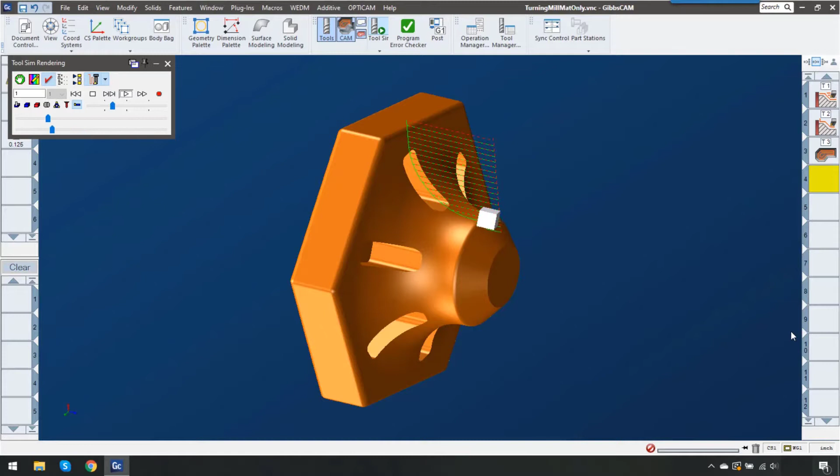This video is going to show the new 3D material only feature in GibbsCAM 14. This feature will calculate the leftover material not just between operations, but between coordinate systems and even between turning and milling operations. We're going to use this example here. So let me get out of simulation and show you how it works.

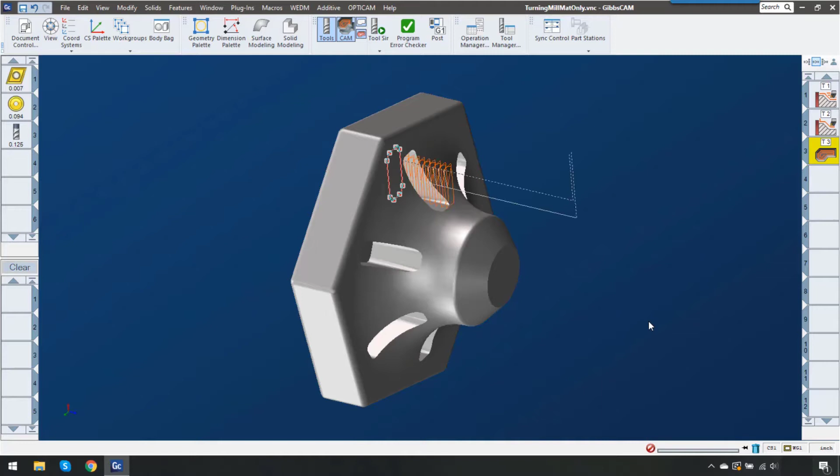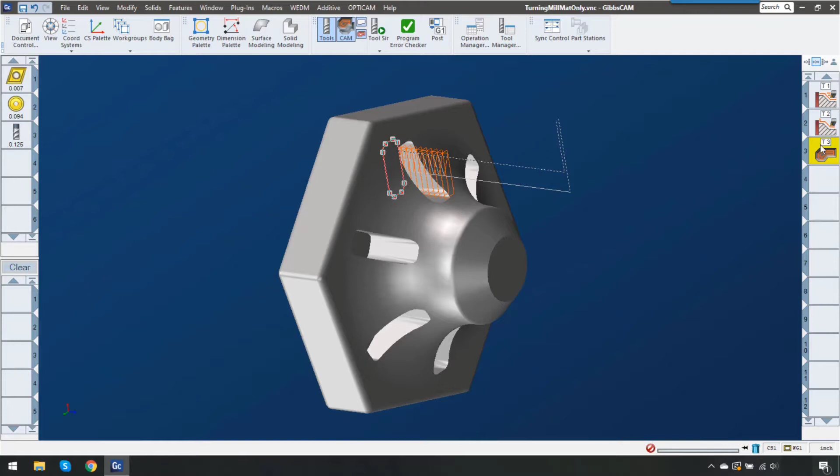So after this part is turned, we're going to end up with a profile, something like this. And because of this profile, you can see that there's going to be a lot of air cutting here to do this pocket. What I want to do is I want to tell GibbsCAM, hey, there was something that happened before this. Let's ignore that material that's not there. And now in GibbsCAM 14, that's really easy to do.

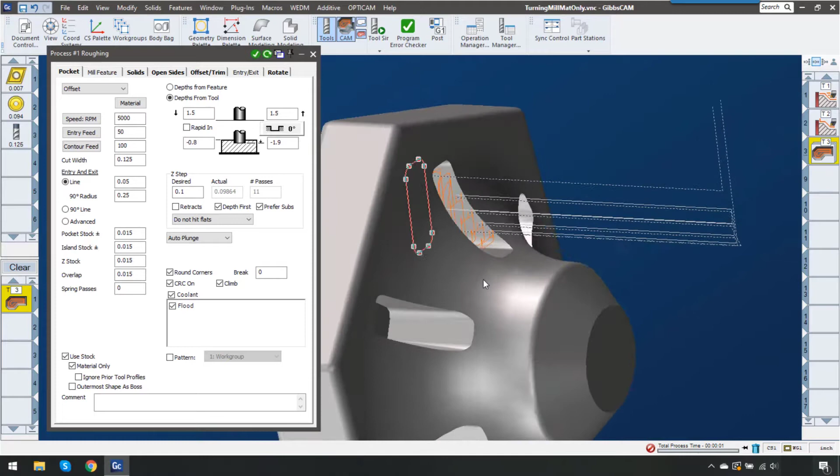So down here at the bottom, we have use stock and just click on material only. This will calculate the leftover material regardless of operation or coordinate system. Now you can see how much more efficient that toolpath is. This is going to cut down on air cutting, which is going to really speed up your cycle time and get parts off the machine much faster.

Now this example was using the difference between a milling operation and a turning operation. Now let me show an example where it's between two milling operations but using different coordinate systems. This milling part, I want to machine on my 5-axis. I need to rough it out and finish it, but the reach on my roughing tool is only about 1.5 inches, and you can see here it's 3.5 inches tall. So I'm not going to be able to get all the way down.

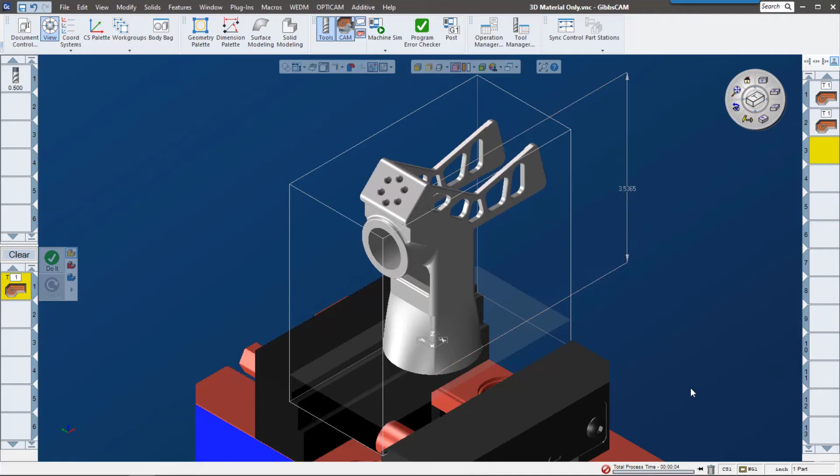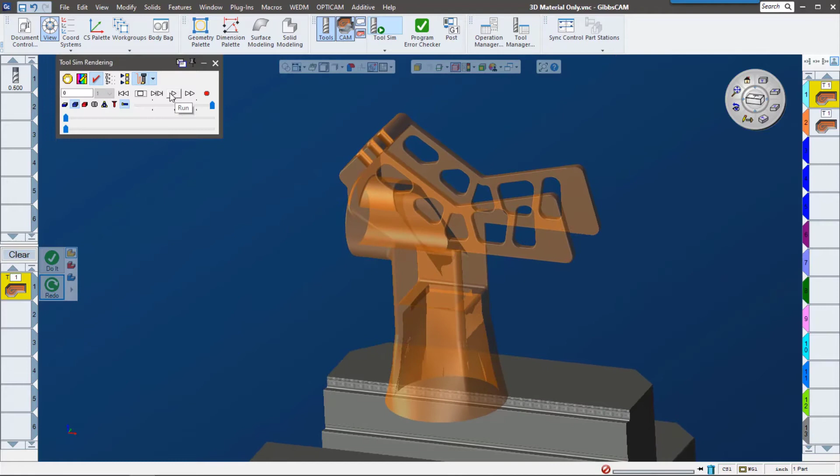Now, the problem is I don't want to have my second tool in this setup have to go through and recut all of the material that it thinks is still there from the previous setup. Now I'll show you an example of that with tool simulation. Here's the toolpath representation from the first tool. Let me continue on to that second tool.

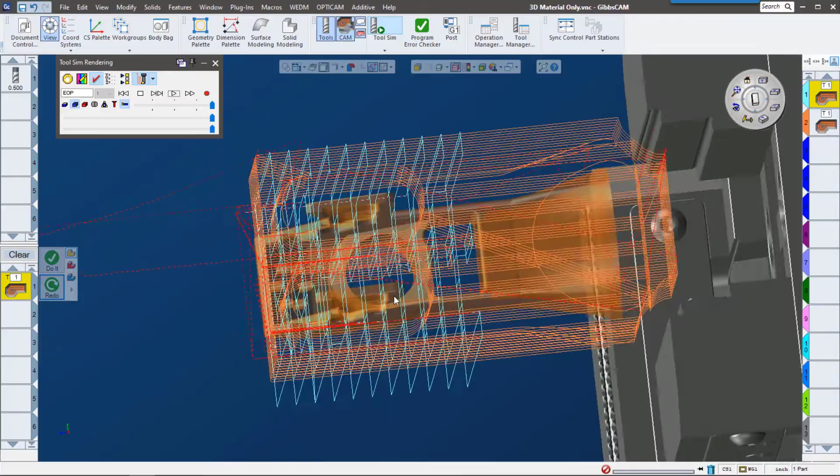So we can see that there's kind of this cross hatching where the two toolpaths actually overlap. If we kind of look at the top view of this, we can see that the second toolpath is actually coming out and trying to clear away the material that's already gone. In GibbsCAM 14, it's really easy to change that. There's this checkbox that says material only. I'm going to go ahead and redo the toolpath.

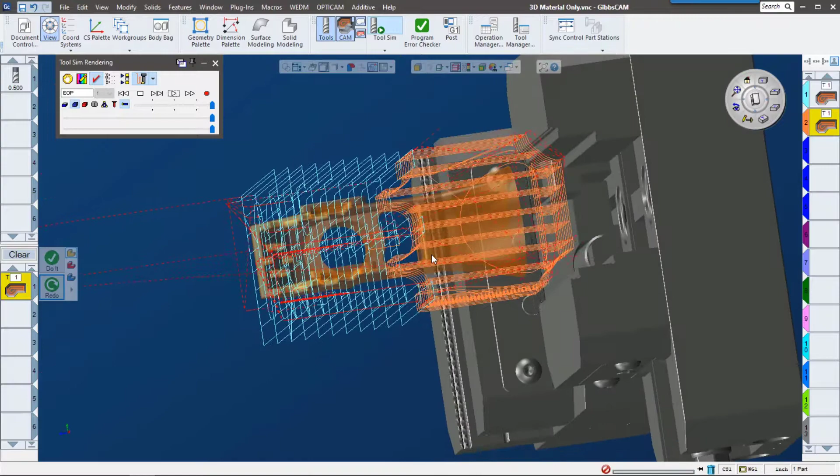Let's go ahead and play it now. Now we can see how that second toolpath only addresses the areas that the first toolpath missed. Let's check this out in Machine Sim. I'm going to go ahead and speed through that first toolpath. So we can see the material that it took away. It took away a good amount of material. Let me back up so we can see the rotation here.

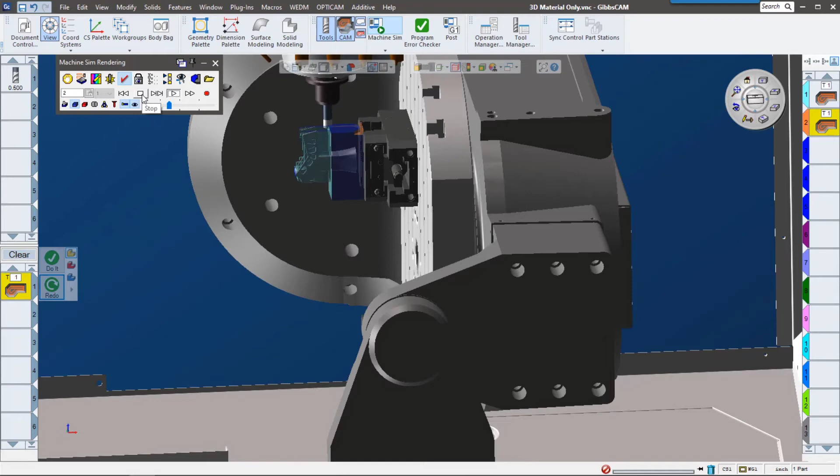So now you can see as I zoom in, that tool is only addressing the material that's left over from that first toolpath.